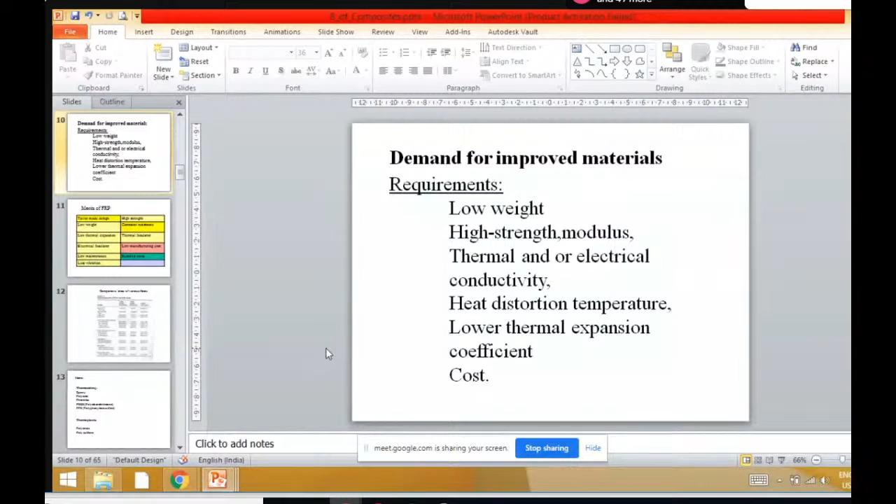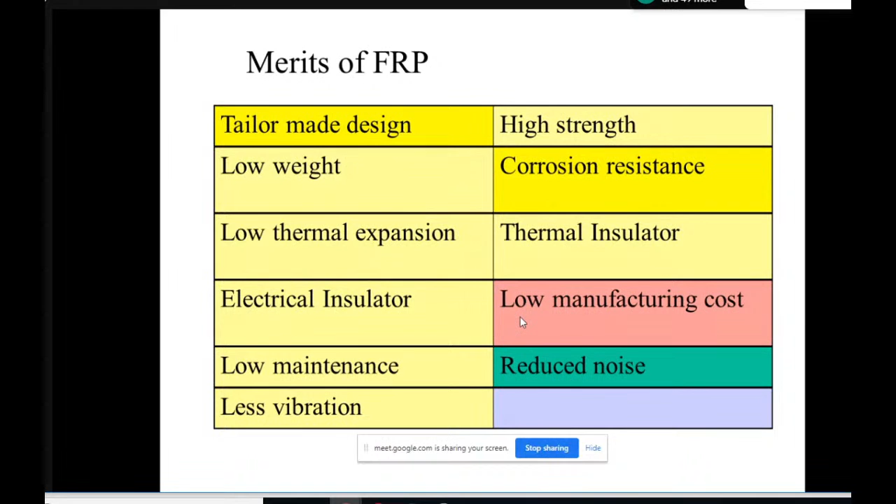So I was talking about this requirement for the improvement in the material. We wish for improvement in heat distortion temperature, lower thermal expansion coefficient, and the cost of the product. This is the main crux of FRP - what are its merits? It is a tailor-made design, so that you can derive whatever property you wish, and accordingly the proportion of the reinforcement and proportion of the matrix can be decided. Low weight, low thermal expansion - all these points I have already discussed. So the merits of FRP, the major one is tailor-made design - you can have your own desirable properties of the composite materials.

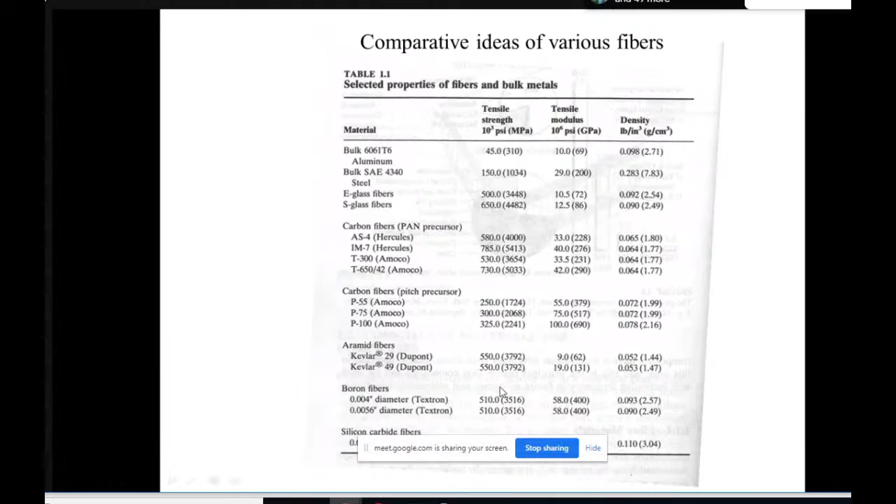Here I have just put a table for your comparative ideas. In the beginning it is not required, but various materials and various combinations can give you properties, say tensile strength from 45 to 510. So this is how properties can be changed or designed for a material.

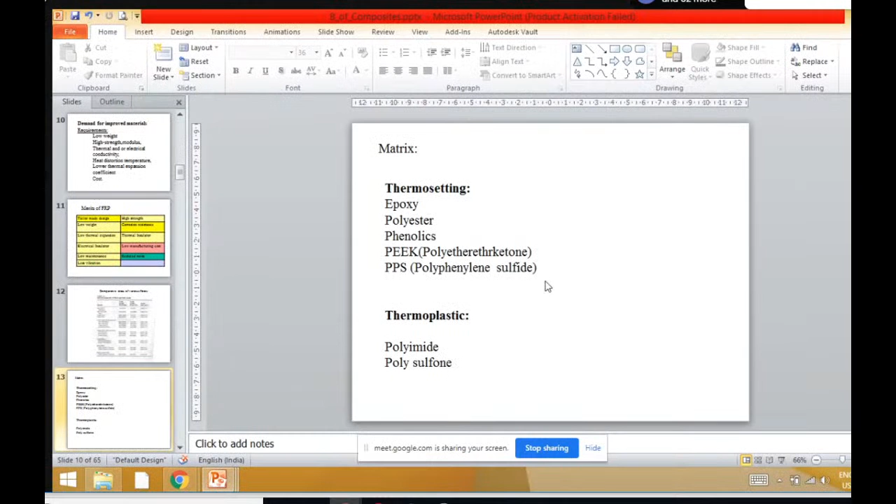Now, what are the different thermosets mainly used for composite materials? They are epoxy... Are you able to see the screen now? Yes sir, yes sir, yes sir. Okay.

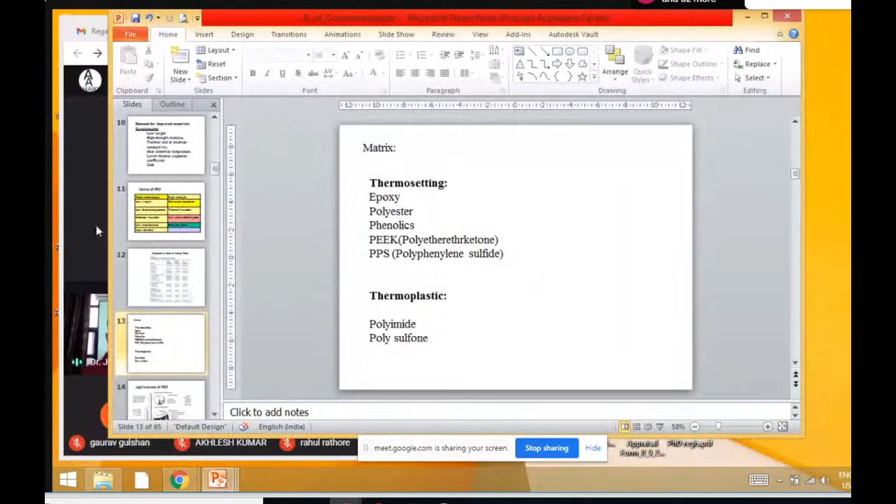Or I may have a slide like this. Yes sir, visible. So I think that the full screen option is better than this. Okay.

So thermosetting matrix materials mainly used for composites are epoxy, polyester, phenolics, PEEK, PPS, and similarly for thermoplastic, polyimide, polysulfone - these kinds of materials. Even nylons, acrylics are also gets extruded.

The application of FRP in various sectors - you can see from here that industry, aerospace, and sports are the major areas where composite materials are well known. After 1960, because of major aerospace projects where the cost of placing an object into space was very costly, the invention of this composite material was made, and it was fruitful for aerospace application. Even now, all consumer products are also available with FRP materials.

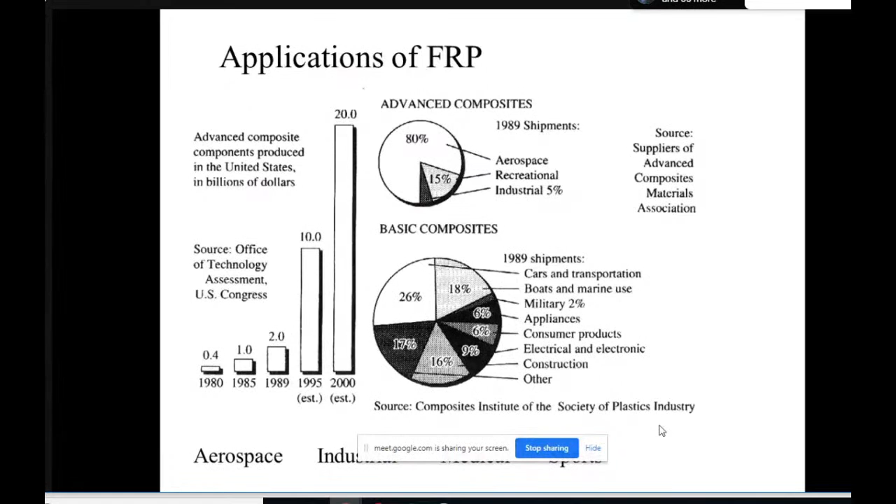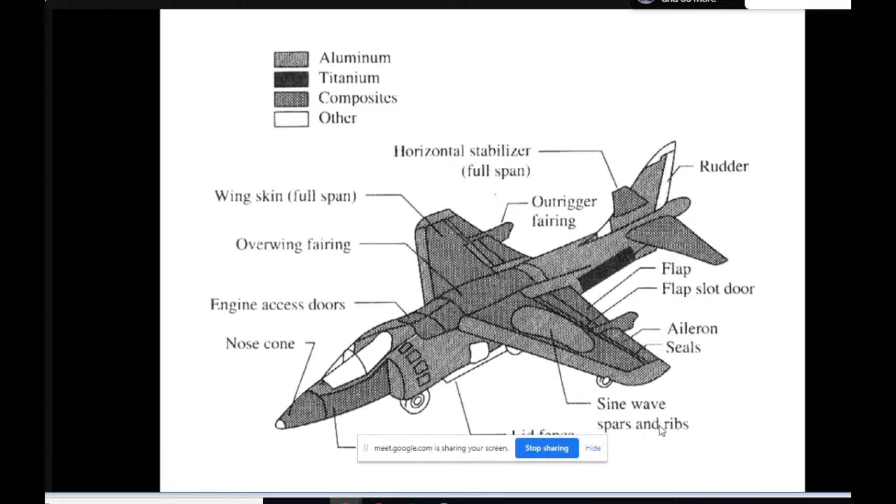This screen will be able to give you just a judgment that in aircrafts, the use of aluminium, titanium, and composite - these are the major materials which occupy the area for material utilization. So these two slides basically give you the idea.

In composite, people use the reinforcement graphite and Kevlar majorly rather than glass. Glass is normally used for consumer products for general purpose. But carbon, graphite, Kevlar - these kinds of high strength fibers - are mainly used in the aircraft industry because of their high strength property and low weight.

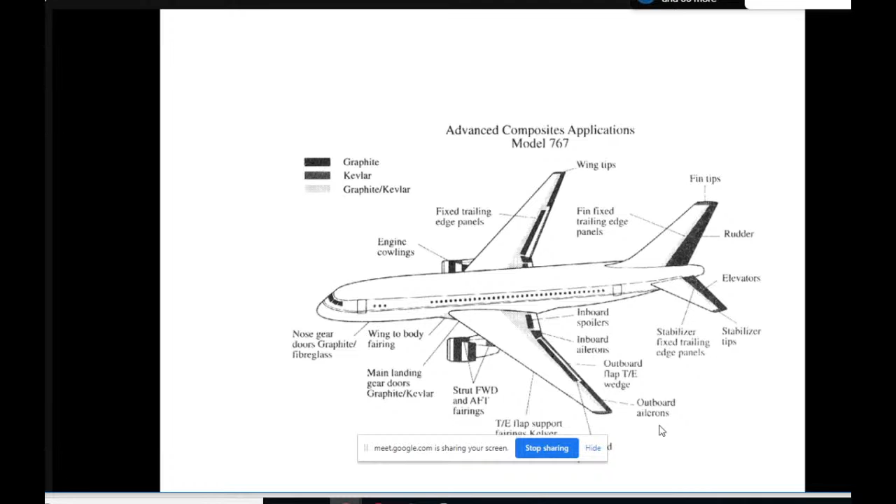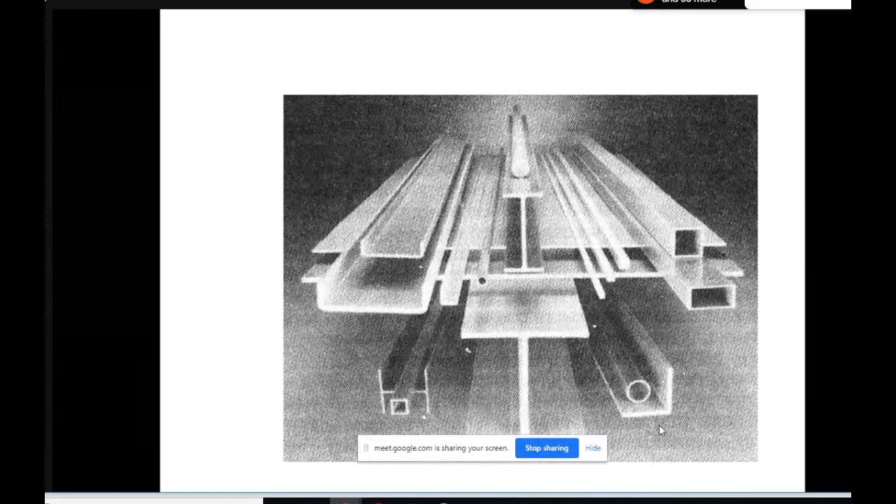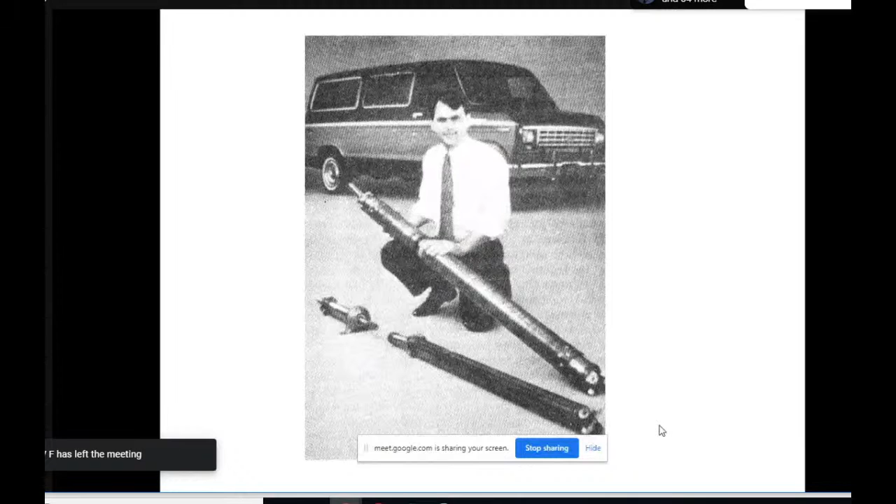Similarly, these FRPs are also extruded to various sections. Just like PVC pipe and other plastic material, the reinforcement materials are also available as FRP sections like pipe, round, circular pipe, square pipe, plates, and so on. Even shafts are being winded. Filament winding process is one of the good processes for circular objects to reinforce, or at times pipelines which we put below ground level where you don't want corrosion. Under that circumstance, filament winded products either from external surface or internal surface are prepared.

The demerit of FRP is welding. Repairing is a very big issue in FRP. If your aircraft is having a bird hit, under the circumstances some crack is formed. Now that component will not perform as it was performing earlier because of the formation of crack. It is not the case like metal that you can do the welding - it always gives you a long-term damage. So joining of FRP, welding and repairing, is a big issue in case of FRP.

However, there are solutions available. People used to put a patch on it. A composite patch is applied onto the damaged surfaces to restrict the growth of the crack.

Of course, the environmental condition also makes a difference - the resin surface gets deteriorated, and if the atmosphere produces moisture, that moisture will be absorbed by the fiber and they swell, and the interface gets affected by these kinds of things.

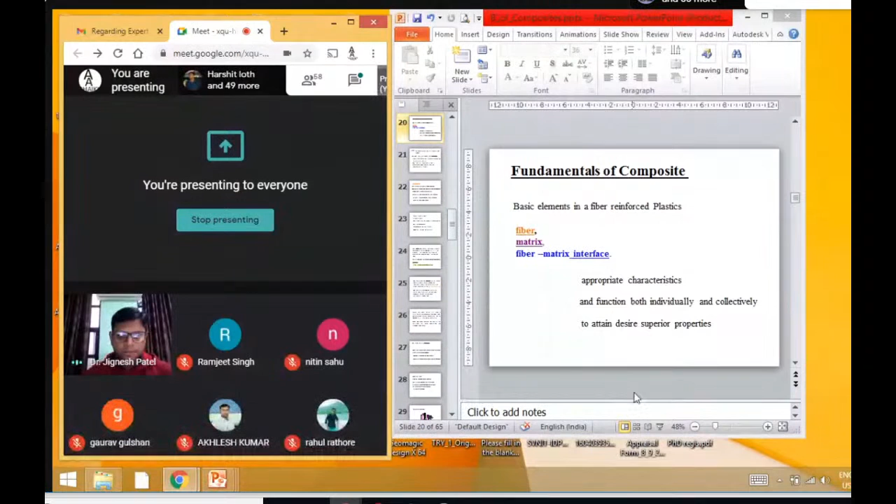The basic elements in FRP are fiber, which we say is the reinforcing element, matrix element, which basically holds all the fiber in appropriate position, and the third important point is the fiber matrix interface. Wherever the joining takes place at the surface of fiber, we say fiber matrix interface. There is one more term which defines this interface as 2D, or interphase as 3D.

So the bonding, if it is of zero thickness, we say interface, where they just begin to contact, and when there is interaction taking place between both surfaces and they form a 3D zone, we say interphase. Later on we'll see some slides on how to check this interface, whether it's sound or not. So appropriate characteristics at the interface and their function, both individually and collectively, are required for attaining the best properties of the composite. If there is no proper bonding, then the composite strength will be weak - there may be a failure at the interface.

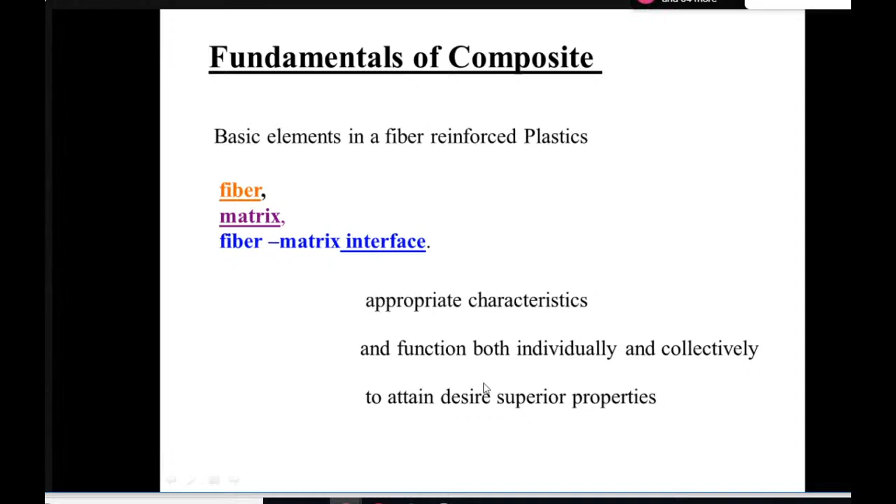Fibers have extremely high tensile strength and moduli, and they are defined as a fiber if they are longer than 100 micrometers and the length to diameter ratio is greater than 10. The tensile strength of the fiber is many magnitudes greater than the same material in bulk. The meaning is, if I take aluminium as bulk, and if I derive the wire from aluminium, then it is aluminium fiber - the properties of the fiber will be high as compared to the bulk material, because the thinner the material, the flaw will be less.

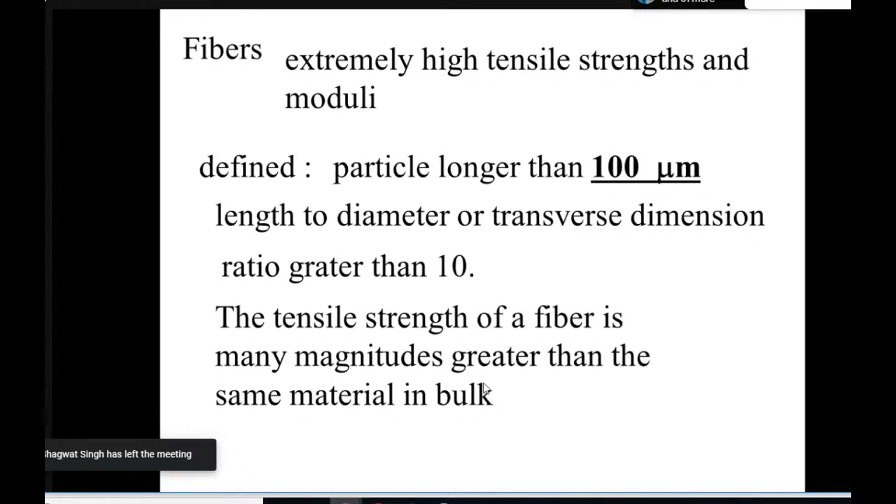That is Griffith's law. The thinner the material, it will exhibit good property because you are removing the flaws from the material. Bulk graphite, a brittle material, has a strength of 10,000 pounds per square inch. The commercial graphite fibers have, you can see, 800,000. So you can see the improvement in the particular property as a bulk material versus a fiber material. So basically this slide gives you an idea that when the material is available as a bulk material, it has certain property.

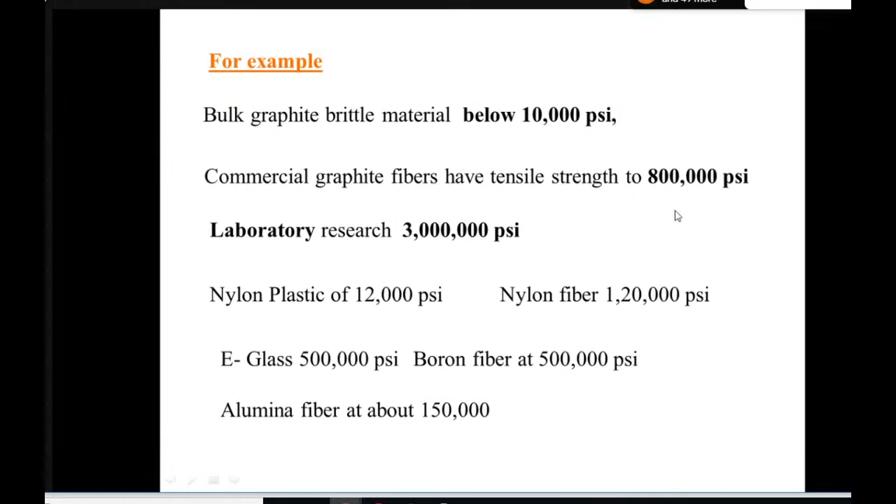But the same material, if it is converted to fiber, the properties will be improved tremendously. The Griffith law repeats that the thinner the material, the higher the strength. So fibers normally have high strength. They are the best reinforcement. They improve the strength, and at the same time they lower the cost of the material, not in every case, but whenever the cost of reinforcement is cheaper than the cost of the matrix material, under those circumstances you will get that benefit.

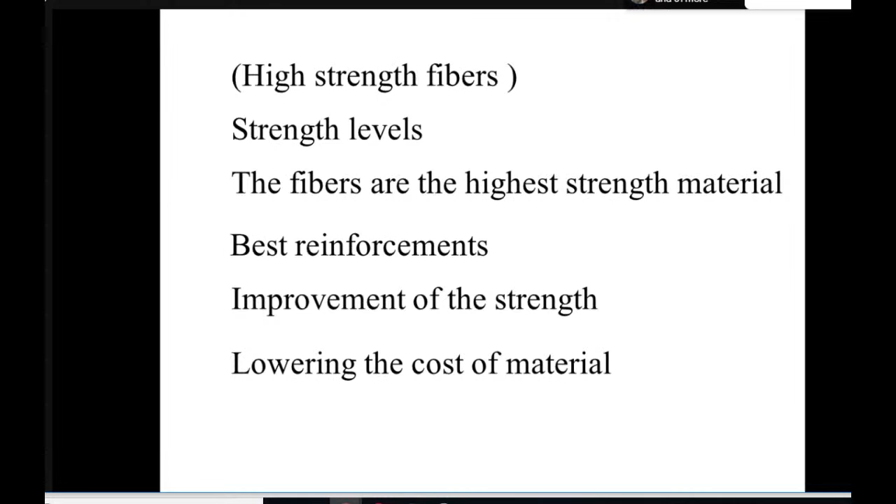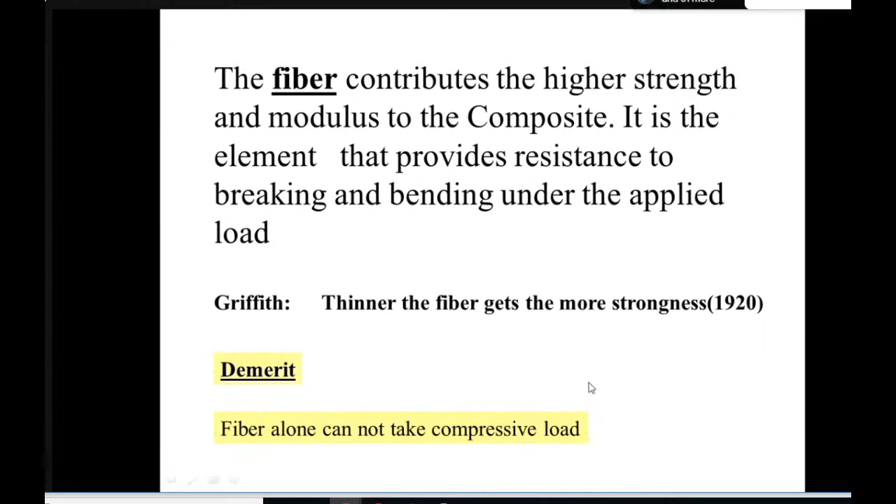The fiber contributes higher strength and modulus to the composite. This I have just discussed with you. The thinner the fiber gets, the more strength it has. The demerit of the fiber is that alone it cannot take compressive load. It will buckle. So you need a matrix. Without matrix, the fiber will not contribute anything.

So the main role of matrix is to transmit and distribute the stresses among the individual fibers and to maintain the fibers in the desired orientation. The orientation may be unidirectional, all fibers available in the 0 direction, or all fibers may be available at 45 degrees, or 90 degrees to the testing axis. In a sample, all fibers should be straight, all fibers should be inclined, or all fibers should be at transverse 90 degrees available. That is the desired orientation.

The matrix also provides protection to the fibers from abrasion and from the moisture available in the environment. So without matrix, the fiber alone has no meaning because it doesn't take any compressive load. And if you want to protect them from the environment, if you want to keep them in a specific condition, you need a matrix. Now when you have a matrix, you create a boundary at which both materials get bonded. The matrix provides protection against fiber abrasion and against environmental conditions. It also causes the fibers to act as a team because all the fibers are kept in intact position. The maximum service temperature of the composite is limited by the matrix.

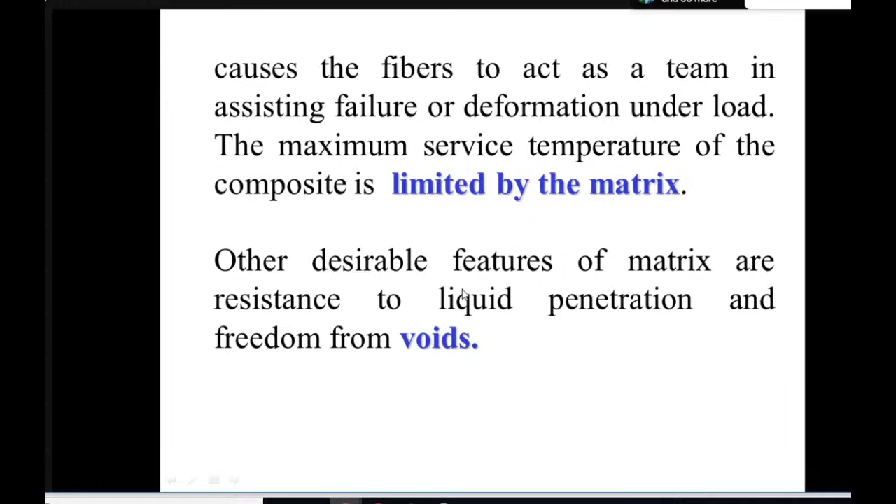So whatever is the limitation of the matrix, that will be applied to the composite material. The fiber may have any property, but the moment the weakest component gets damaged, the entire composite gets damaged. The other desirable features of matrix are resistance to liquid penetration and freedom from void. Void is, say, bubbles of air which may form during the process, created during the stirring of resin material.

Now when you apply them, the boundary which we already discussed is the interface. Localized stresses are usually highest at or near the interface. Whenever we design a metal component, we check that if welding is applied, if it is not failing from the welding joint, the component is safe. Exactly the same way, whenever there is an interface, you need to check the interface. Is there a perfect bonding between the surfaces of fiber and matrix? If it is there, then your composite is safe. And if it is not there, then interfacial debonding will be the major cause of failure of the composite material. Now, if there are issues at the interface, premature failure of the composite is also possible.

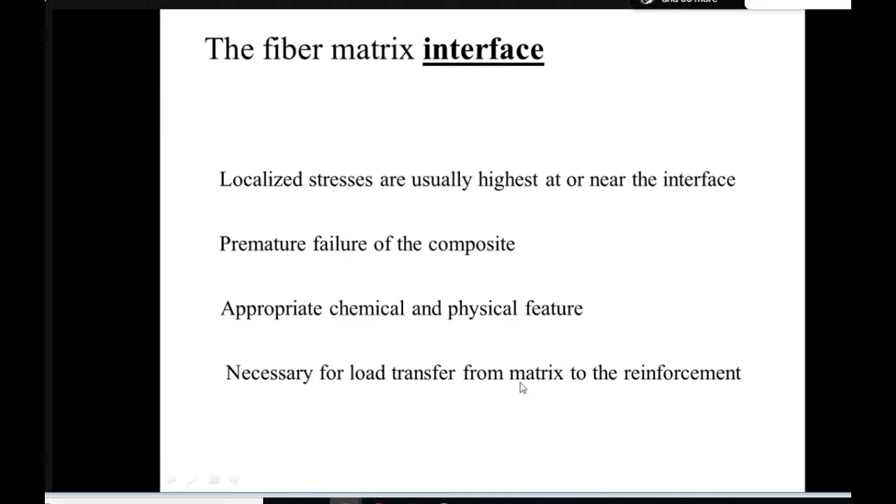But appropriate chemical and physical features are also necessary in both materials for a good interface. This interface is necessary for load transfer from matrix to reinforcement. This is a very important statement, because whenever we design, we should take this concept that basically load transfer is not from fiber to matrix, but it is from matrix to fiber. Now, this interface can be improved by using an appropriate coupling agent.

The interfacial bond must resist stresses due to differential thermal expansion of fiber and matrix, shrinkage of the resin during curing, and must protect the fibers. Even in a bridge, after a certain span, there is a gap of say 1 or 1.5 inches to account for environmental conditions, since material shrinks in winter and expands in heat. If it were one piece, cracks may form. Similarly, terrace tiles get debonded in hot conditions because of thermal expansion. So you can apply an appropriate coupling agent to improve the interfacial condition.

This bonding is very important. Failure at the interface should always be avoided.

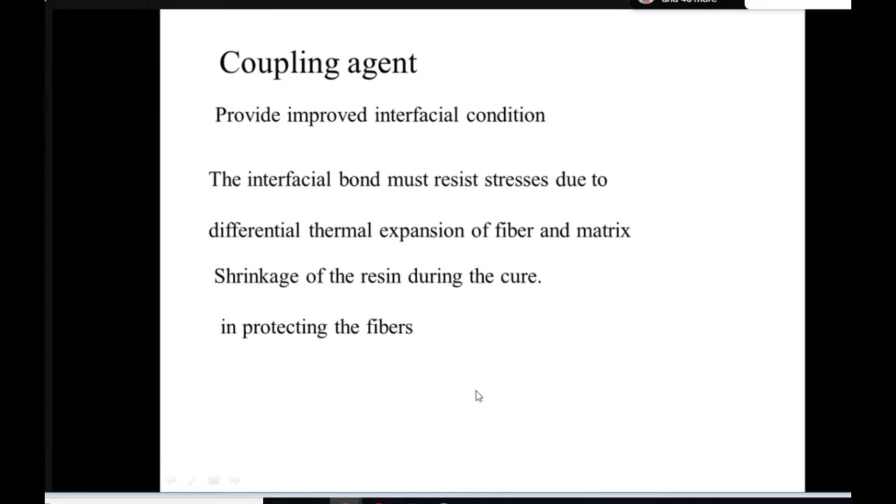Before I go to the manufacturing processes, I'll give you one more slide.

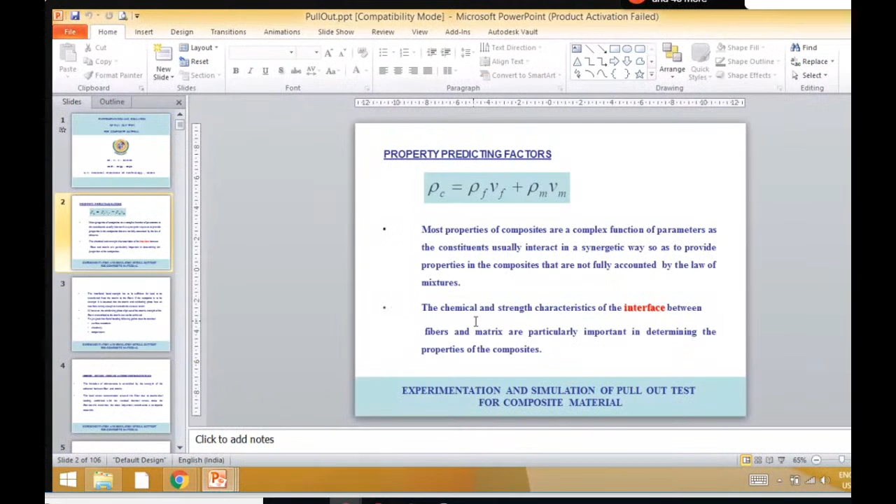Interface and interphase: the interface is defined as a two-dimensional border between fiber and matrix, in cases where no interphase is considered to be present. Interphase means a three-dimensional region. If it is not formed between fiber and matrix, there will be direct contact between fiber and matrix, and we call that boundary an interface. But the interphase is defined as a three-dimensional region between fiber and bulk matrix with a different morphology, chemical composition, and mechanical properties compared to both fiber and matrix.

In the case of metals, we call this alloying. When we mix two different materials, for example adding chromium to aluminium, alloying takes place, and that alloy has some different property that doesn't match either part A or part B. In exactly the same manner, the three-dimensional region formed between fiber and matrix is the interphase, a 3D region between fiber and bulk matrix with different morphology, chemical composition, and mechanical properties compared to both fiber and matrix.

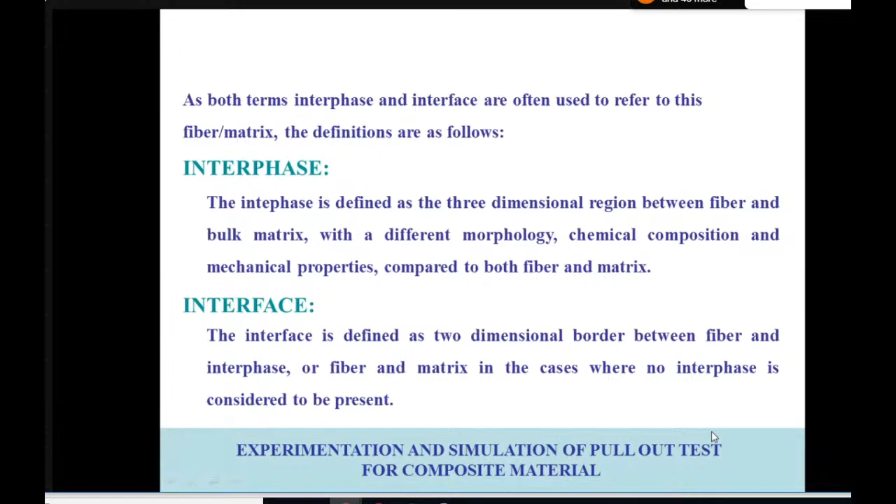So here, to measure this bond strength and check whether a perfect bonding between fiber and matrix has been generated, this can be taken care of using the pull-out test. For beginners, understanding this property, the bonding between fiber and matrix, is very important.

For that, people go for a pull-out test. Normally we go for a tensile test, compression test, or shear test, but whenever we talk about composite materials, we should always first consider the bonding between fiber and matrix at the interface.

In live classes, I often give the example of bond materials like Quick Fix, Quick Bond, Fevi Bond. When you want to join anything to anything, you just put a drop and stick them together. On the box it's written that you can join anything to anything, except a broken heart. People usually laugh when I say this in class. Now let me explain what this broken heart means.

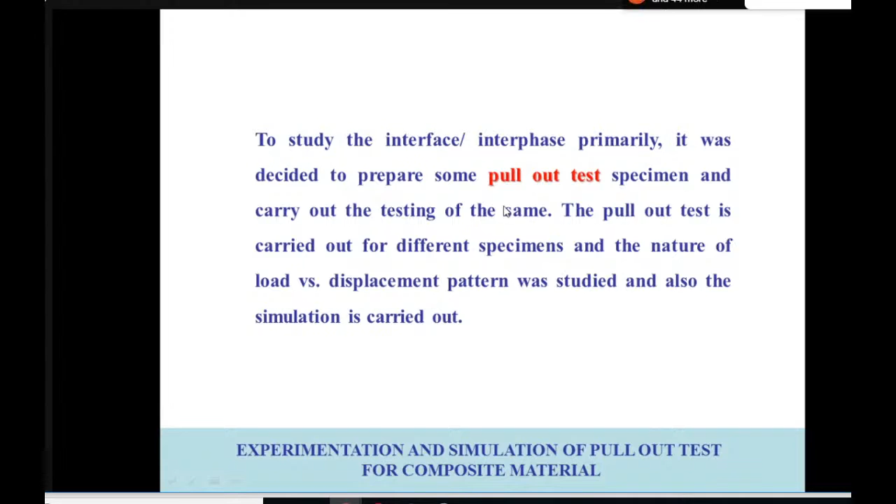Compatibility of the material is very important. Compatibility between the materials is very important. I think there are some properties here, let me show you this one: wettability.

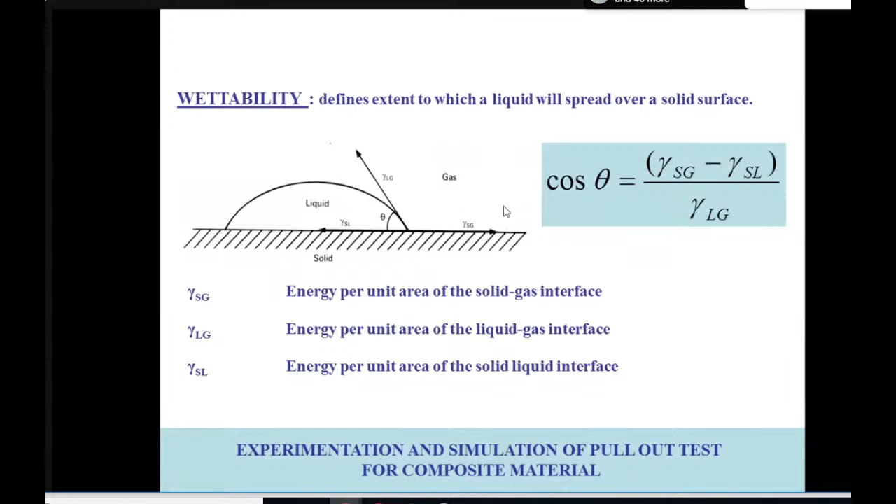This purely depends on the material itself, material A and material B. If you apply a resin to any fiber, maybe carbon, boron, or graphite, and that resin is not able to wet it properly, you will get a dry region in the composite material when you cut it. Wherever there is a dry region, you cannot design a proper composite; it's a very big demerit for the composite material, and the interface surface will not be appropriate. So interfacial bonding means once the matrix has wet the reinforcement and is therefore in intimate contact with it, bonding will occur.

So this is very important, you need to read this initial line. Once the matrix has wet the reinforcement and is therefore in intimate contact with the reinforcement, bonding will occur. In design of composite material, there is a first assumption that there is a perfect bonding between fiber and matrix, then only the rule of mixture will be applied. We'll see later on what is the rule of mixture.

So here I'm narrating the same thing with different definitions, that it is an interfacial bonding. The matrix should be able to wet the fiber. If it is perfectly wetting the fiber, then there is an intimate contact, perfect bonding, and then the material is perfectly designed. Now a number of different types of bonds may be formed when you apply this condition.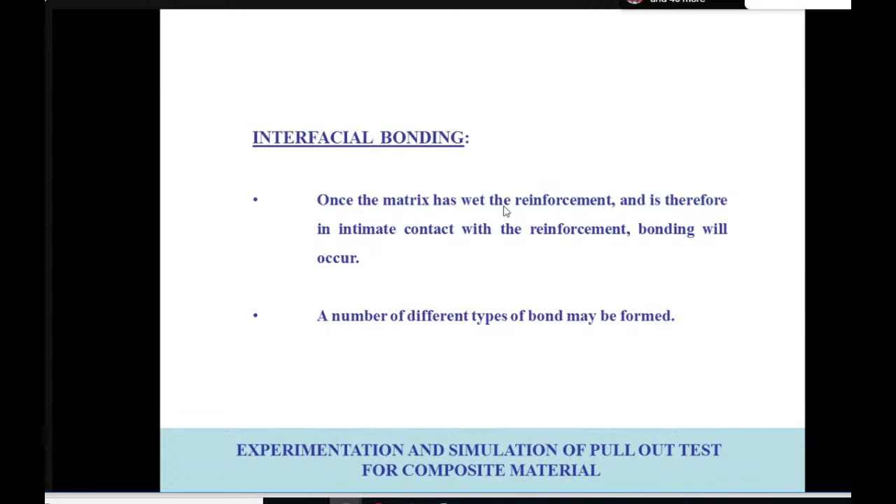So we say interfacial bonding, say mechanical bonding. You know that on a bike accelerator there is a serration, mechanical serration. Why is there a mechanical serration? So that our hand can properly grip it. If our hand is not able to properly grip that accelerator, there may be slippage. Now, in order to avoid that kind of slippage, the surface should be rough. It should not be smooth, it should not be a finished one. It should have irregularity so that mechanical anchorage takes place. This is mechanical anchoring at the two surfaces.

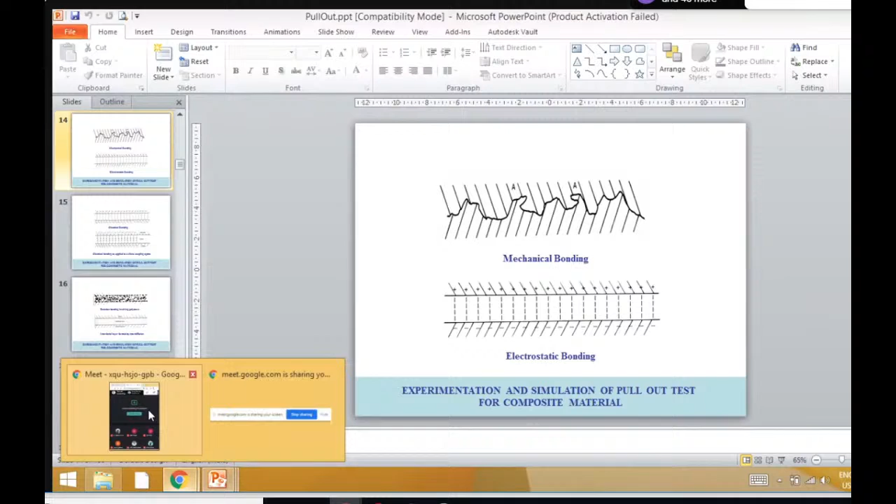Hello, any issue? Are you able to listen to me? Yes sir, am I audible? Yes sir, yes sir, yes sir.

So mechanical bonding is the best thing, and therefore a lot of research papers you will find on surface treatment for getting better properties of composite material. It is nothing but on the surface of fiber, we are basically removing the finishing and we are creating an etching surface so that this mechanical anchoring can be generated between the resin and the fiber material.

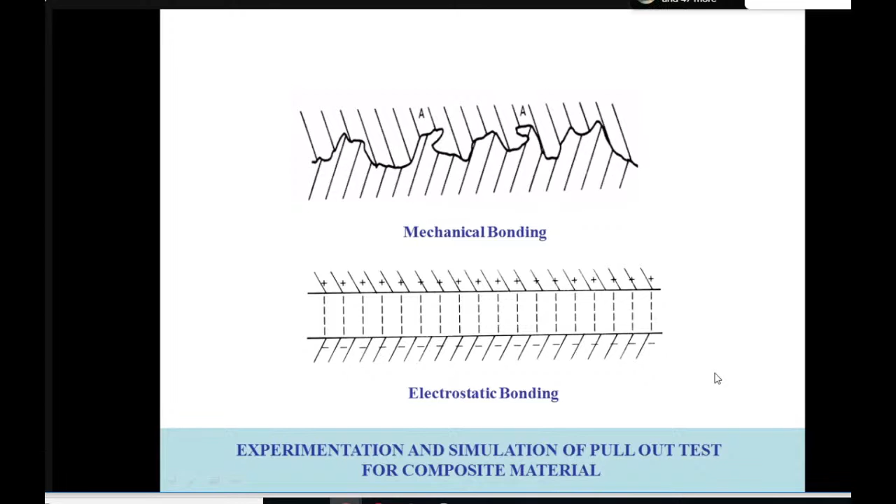Similarly, you can have electrostatic bonding, you can have chemical bonding. So all these kinds of bondings are possible, including reaction bonding.

So a better understanding of the interrelationship between fiber, interface and matrix will lead to the concept of interphase, that is a three-dimensional region between fiber and matrix with different mechanical properties. And if you see many research papers, people working on the interface believe that whenever you bond material A with material B, if there is good compatibility between them, then this three dimensional interphase region will be generated and it will be responsible for the good design, that it will give proper bonding. And the assumption that normally people take in the case of rule of mixture is that a perfect bonding between fiber and matrix can be attained.

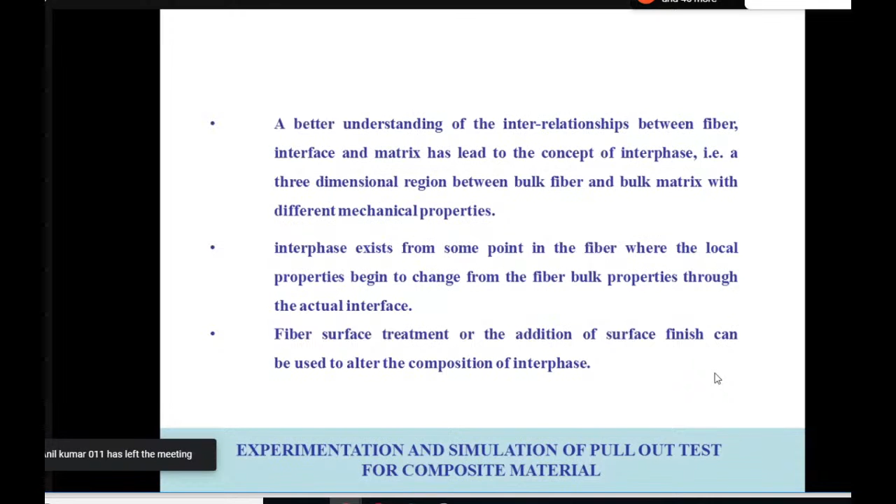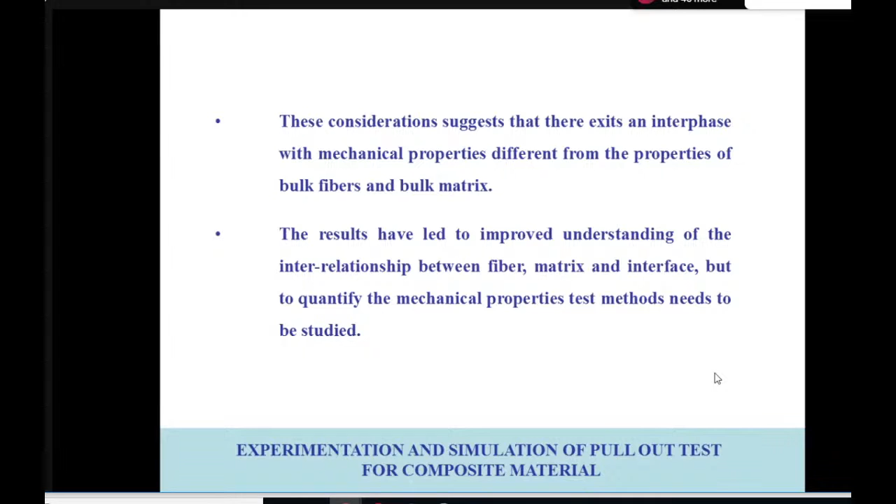Now this term also we have seen, coupling agents. There are certain elements which try to become mediators and they try to improve the bonding by using coupling agents. So this is one of the examples, that coupling agents can be applied onto the fiber surface, or there may be a treatment to the surface so that it becomes a rough surface and it becomes readily available to be wetted by the resin materials.

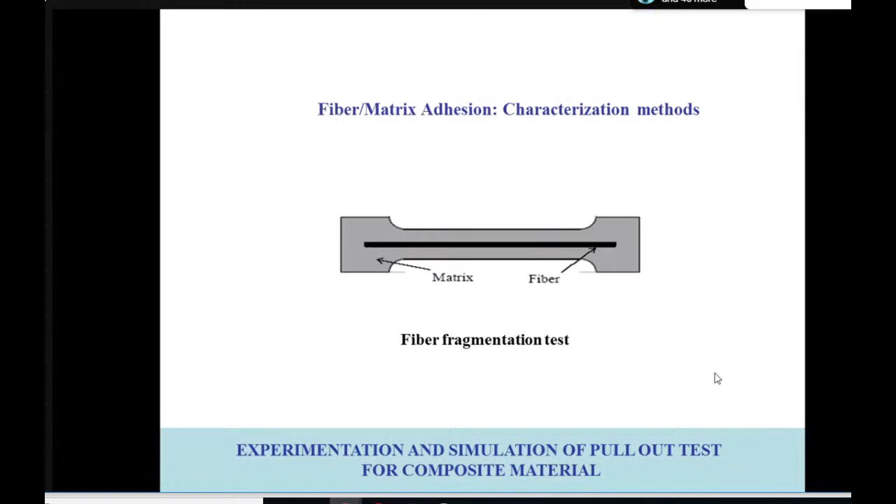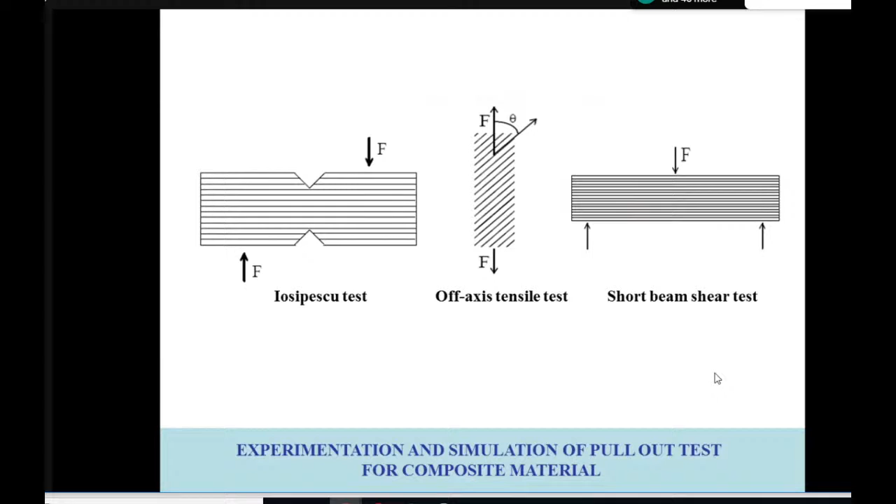Now the fiber matrix adhesion can be tested under this pull out fiber fragmentation test. You can have one test like this. In a matrix, you will have a single fiber, and you should try to test it for unidirectional tensile strength. You can also go for short beam shear, off axis, or this Iosipescu kind of test. So all these tests are possible.

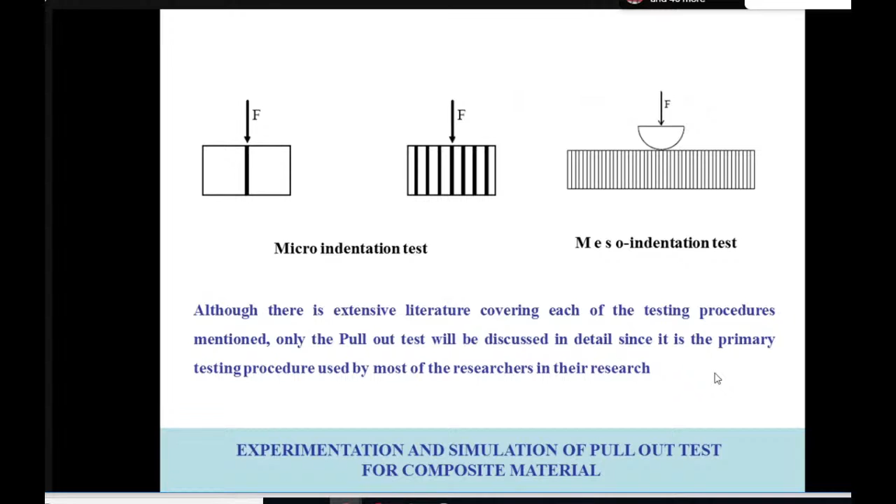Then for a pull out test, you have an option like micro indentation test or meso indentation test. You can see here the arrow which has been shown, which is trying to push the fiber out from the matrix. So these kinds of tests will give you the property of what is happening at the interface. Similarly, you can see here a cylindrical matrix is assumed, and in the center the fiber is being placed as a black colored one. Now if you try to pull this, then this particular surface will give resistance, and this resistance is mainly due to interfacial property between fiber and matrix.

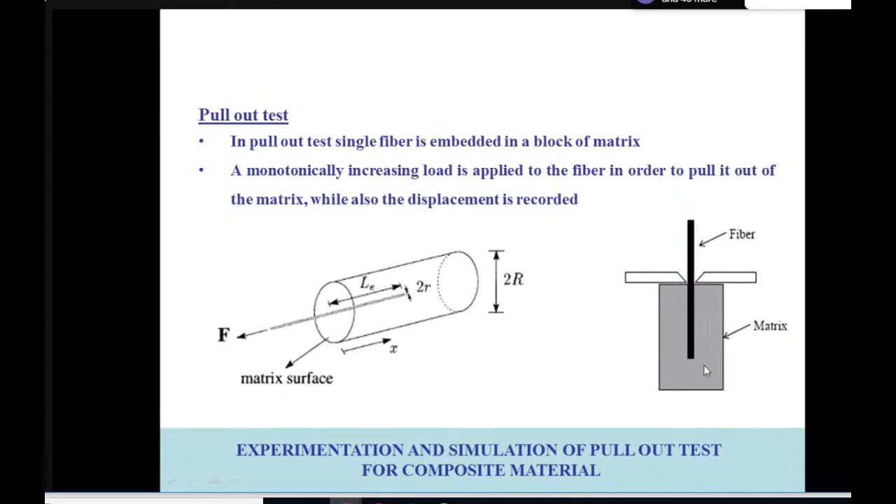So if you are able to remove the fiber easily, then the design of composite is not proper. But if it gives a lot of resistance and then after a certain value of load it comes out, you can say that yes, the interface exists and it will give a good strength to the composite material.

There are various formulas available whereby you will be able to evaluate the interfacial shear stress and many more properties. Here I'll just show you one example with our own experimental work, where you may have a case like this. For case A.

Initially, the bonding will try to keep the internal fiber up to some extent, and then suddenly it will fail, giving a failure like this. The second case, gradually it will give bonding up to a certain limit, then try to give resistance, and then slowly fail. So basically the interface is giving resistance in failure.

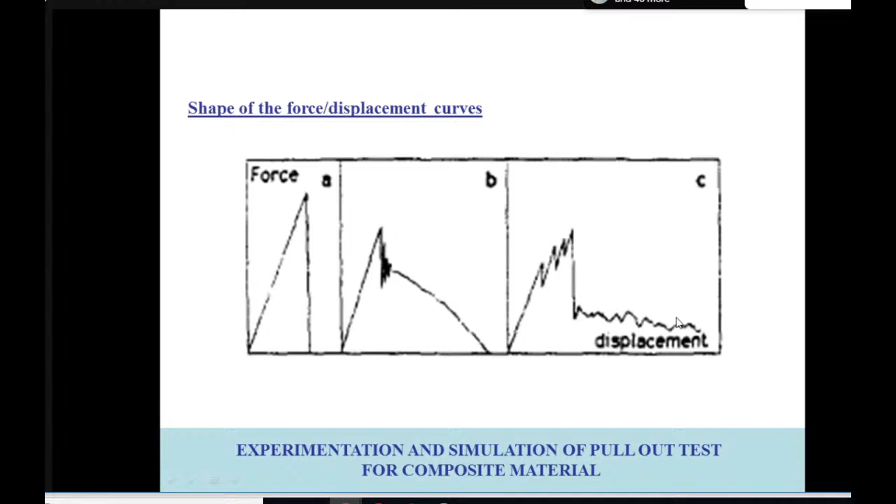The third case, C, is the best case: if you have prepared a staircase kind of structure onto the surface of the fiber, then at every instant it will give bonding and then resistance by mechanical anchoring. That is why we prepare the surfaces of the fiber, and by using a rough surface you can increase the interfacial strength tremendously, maybe from basic bonding to 3, 4, or 5 times, depending upon the kind of mechanical engagement you have been able to generate.

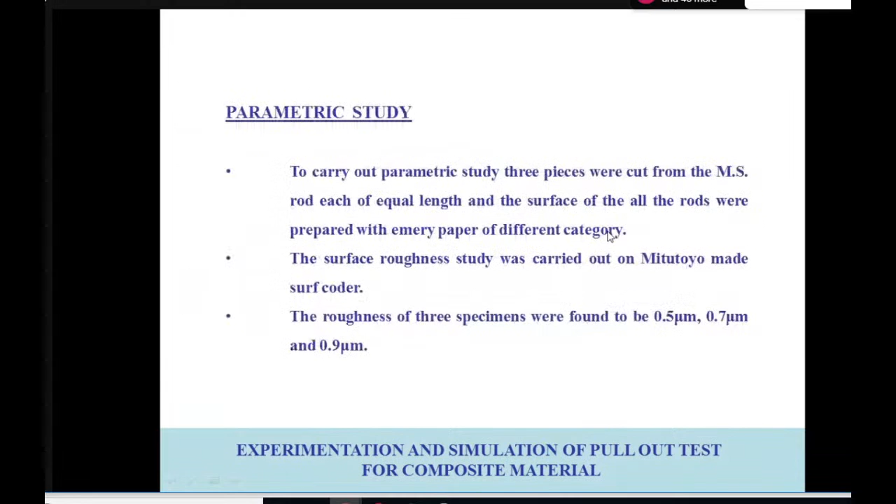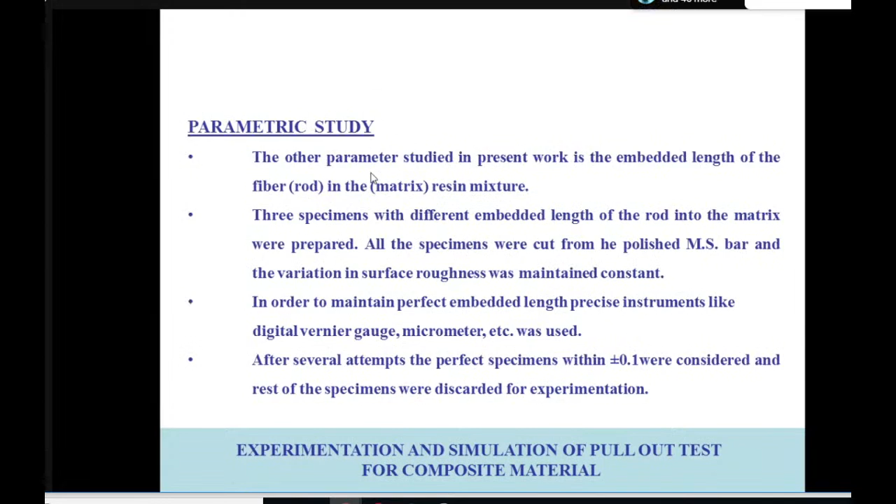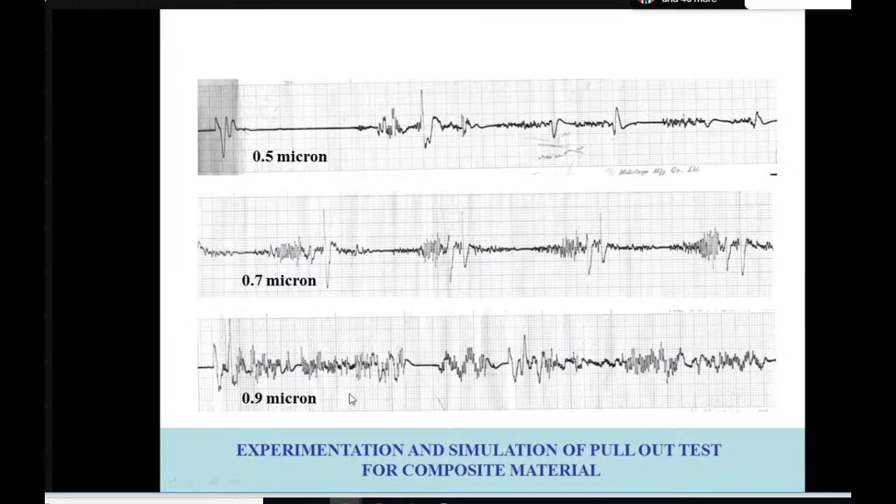This is a polymer, and a rod is inserted into it. Now I take up this case as a single fiber embedded into the matrix material, with the surface of this reinforcement having various roughnesses. For that we took these cases: 0.5 micron, 0.7 micron, 0.9 micron. This rod is initially rubbed with emery paper of different roughness, and depending on that we could measure 0.5, 0.7, 0.9 micron. So various roughnesses were created manually, and specimens were prepared accordingly.

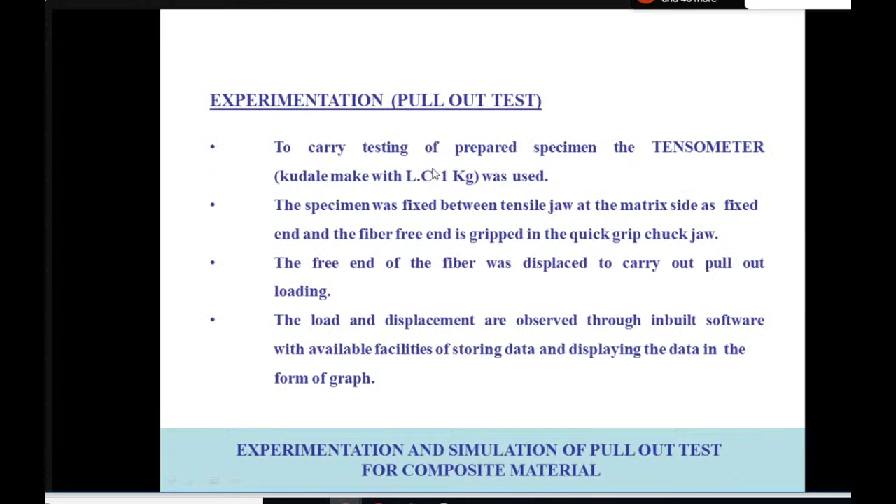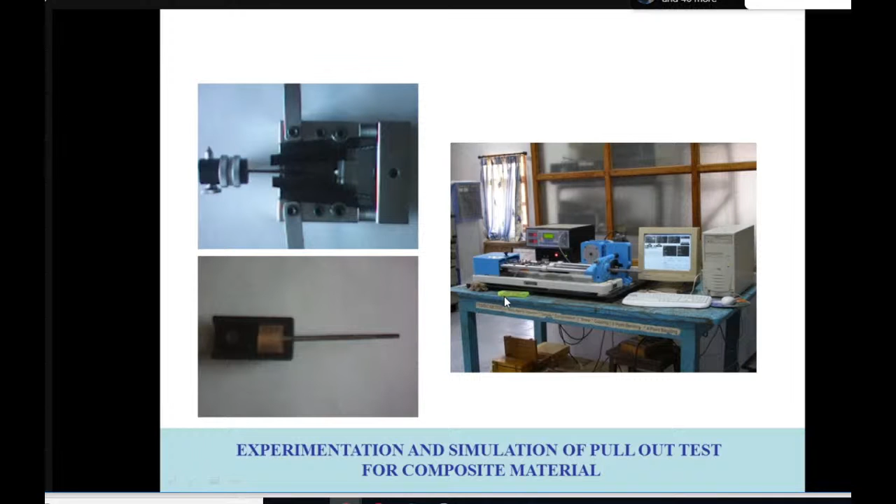Once these specimens are prepared, they are taken to the tensometer. One jaw is used to hold the polymeric portion, and the rod is taken to the other jaw of the machine so it can apply the pull. This tensometer used in our laboratory has a capacity of 2 ton loading during tensile testing, and it has been applied to pull this out completely.

This pull out test gives you the idea of what the strength is at the interface, the bonding between fiber and matrix. We presume there is perfect bonding between fiber and matrix, meaning theoretically there will be no failure at the surface - either the matrix will fail or the fiber will fail - but in real life it may not happen that way.

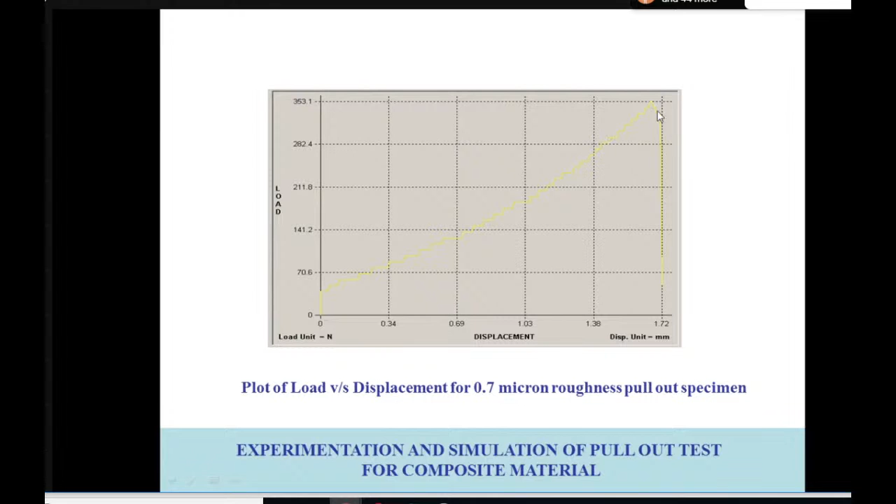This zigzag means that whatever emery paper you applied onto the rod, at every instance you will feel there is a resistance - that is why this peak and valley has happened. Then after a certain period, it falls down. Similarly here for 0.7, it moves up to here and then sudden failure. So this is how you will be able to see these failure results.

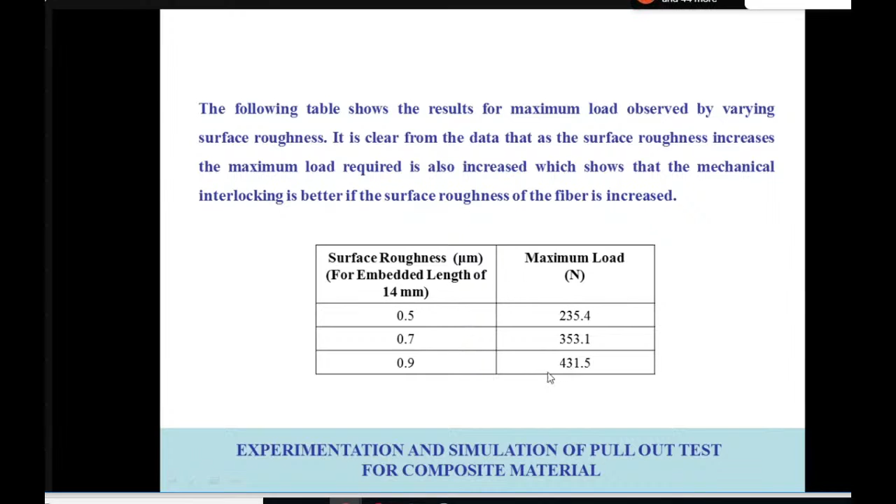I'll just show the table now. See, when there was 0.5 micron applied, compared to when you go for a bigger size of emery paper with more roughness, you get this reading. So for 0.5, 0.7, 0.9, the load required to pull the rod from the polymeric ring keeps increasing.

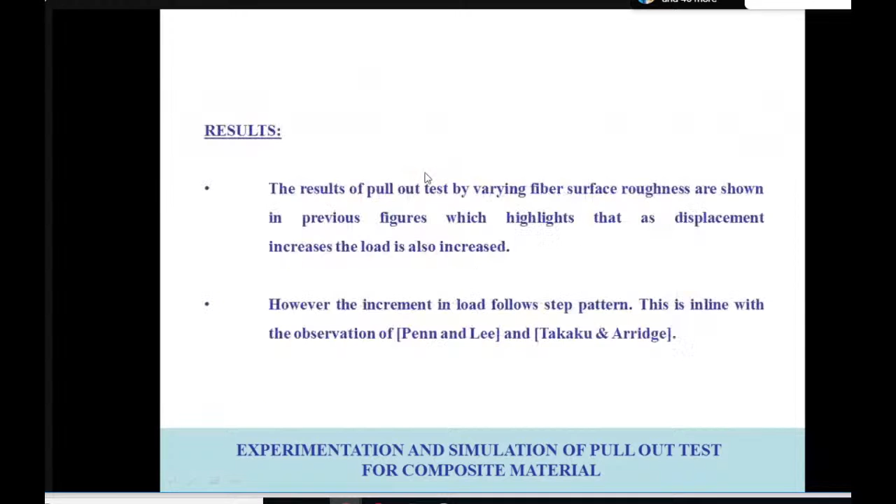The second criteria was varying embedded length. Now if you see this sample, the particular rod which is inserted into it was having a varying length: 4 mm, 7 mm and 10 mm.

So into the cylindrical object of polymer, polyester, we inserted the rod for 4 millimeter depth, 7 millimeter depth, and 10 millimeter depth. By increasing this embedment length, we provide more area of contact between fiber and matrix.

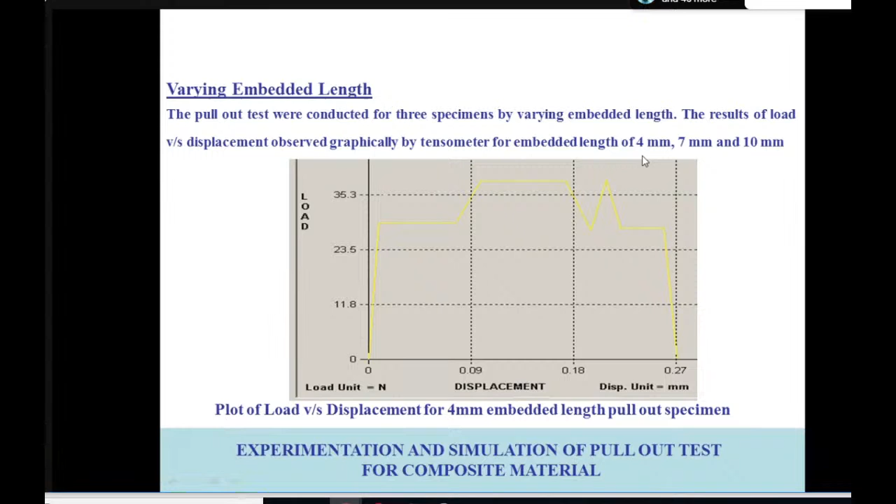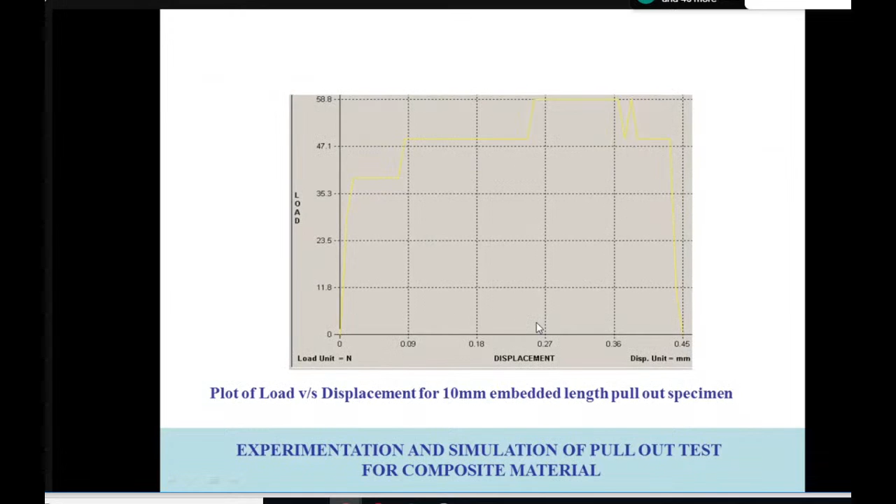So interface surfaces are being increased by this embedment length. Now, if you increase the interface length, what happens to 7 mm, 10 mm, and 4 mm? By results you may be able to see that for a 4 mm the load required is 39, for a 7 mm it's 49, for a 10 mm it's 58.8.

So basically this gives you an idea that if you take the fiber and matrix, what are the different parameters, what contact area you give between the fiber and matrix for bonding, accordingly the strength will be varied. So even if we consider the theoretical case by tackling it with the rule of mixture, we say VF, EF, VM, EM - volume fraction of fiber, volume fraction of matrix, and what is the property of fiber, what is the property of matrix.

But at that time, certain other parameters are also equally important for designing the material, that we have seen by this pull out test, that if the surface area is improved... and that is why now people are using carbon nanotube insertion into the matrix, because at the interface they give tremendous area. 1% of carbon nanotube can increase the percentage of interfacial area into a numerous value.

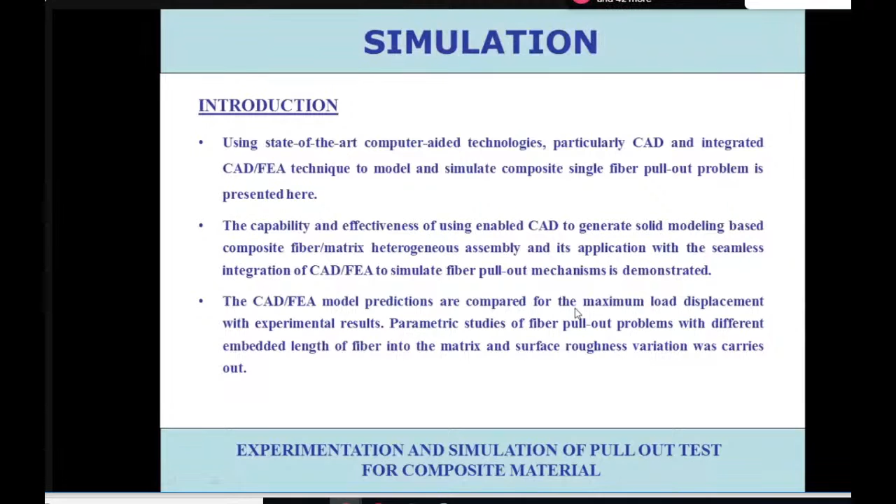So thereby the property can be improved by incorporating the carbon nanotube. Now, the same thing I am showing you here as an experimental case, I have simulated also by the FEM approach.

So we just make a quarter rod, 1/4 area of the rod, and here the cavity is being created for inserting the rod. Now you can see this - this is representing embedded length. This is representing, you can have 4 mm, 7 mm, 10 mm.

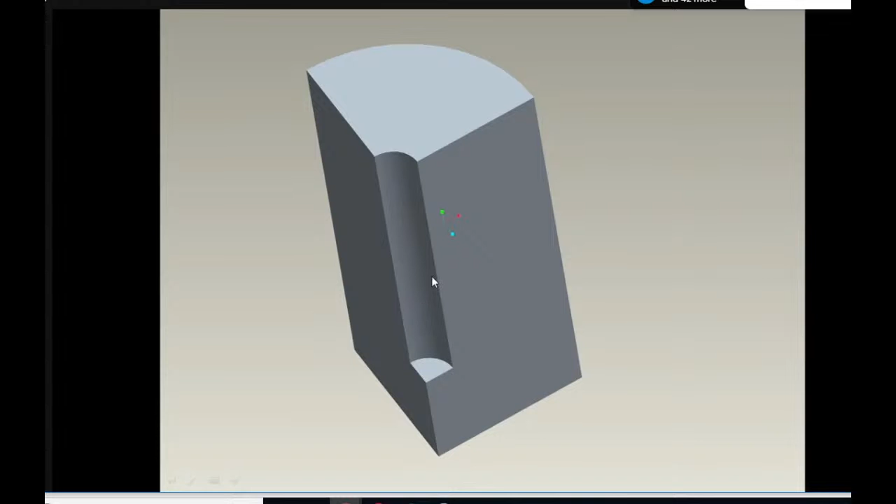And then on this surface, this is a smooth surface. There is no serration, it is purely finished. So it will not resist anything in a zigzag manner - purely bonding will be exhibited by this.

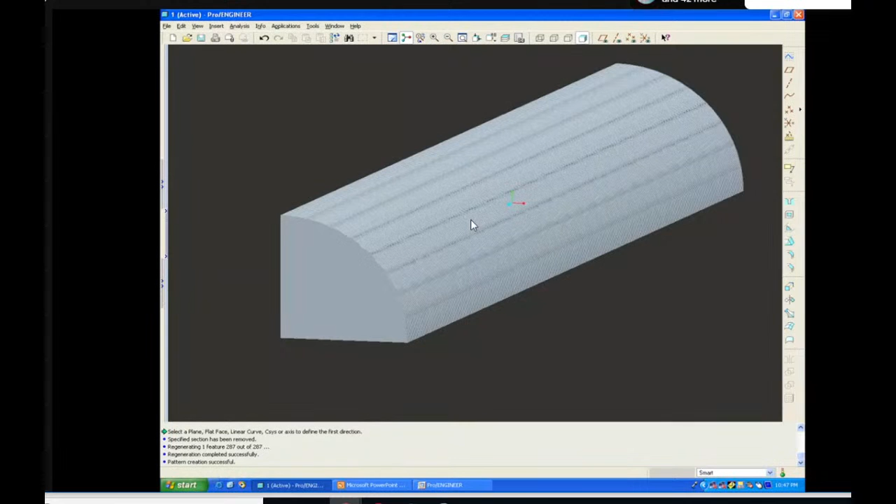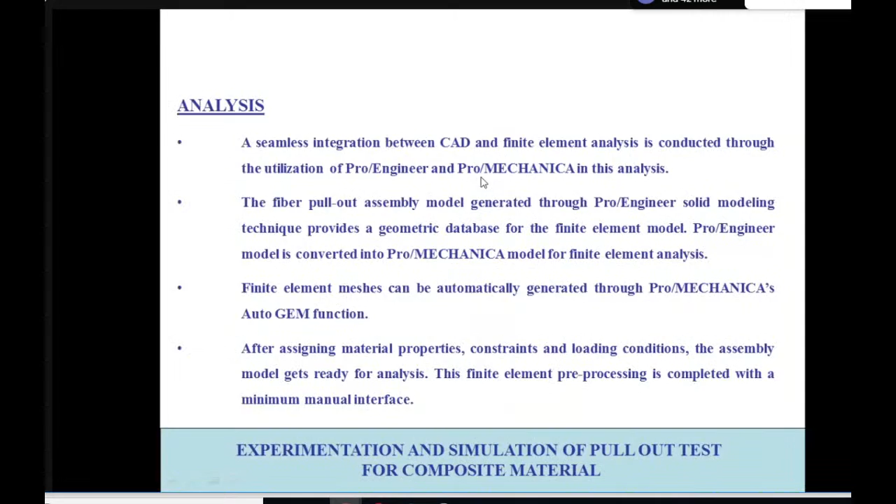Then we go for the analysis using Pro/E Mechanica. Of course, this is not a good software, not appropriate for the highly computational aspect, but for preliminary observation you can use this one. Otherwise, you can go for ANSYS, Abaqus, where you can consider more detail and more options for defining the composites.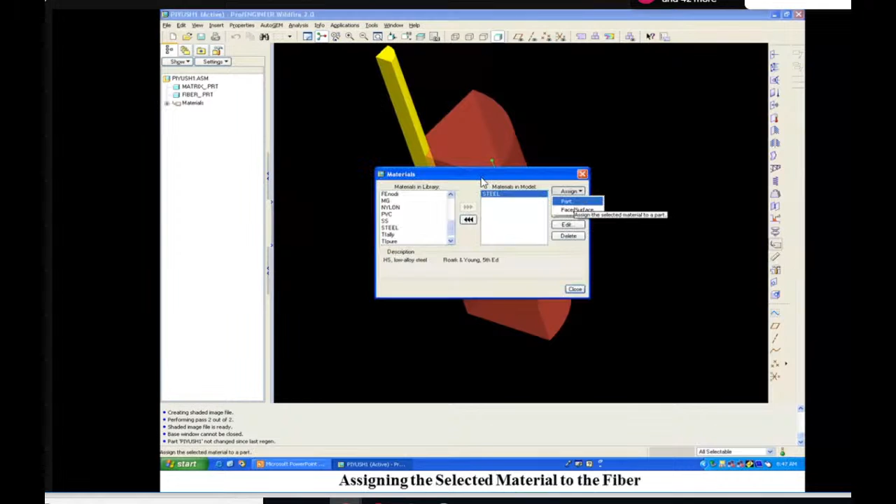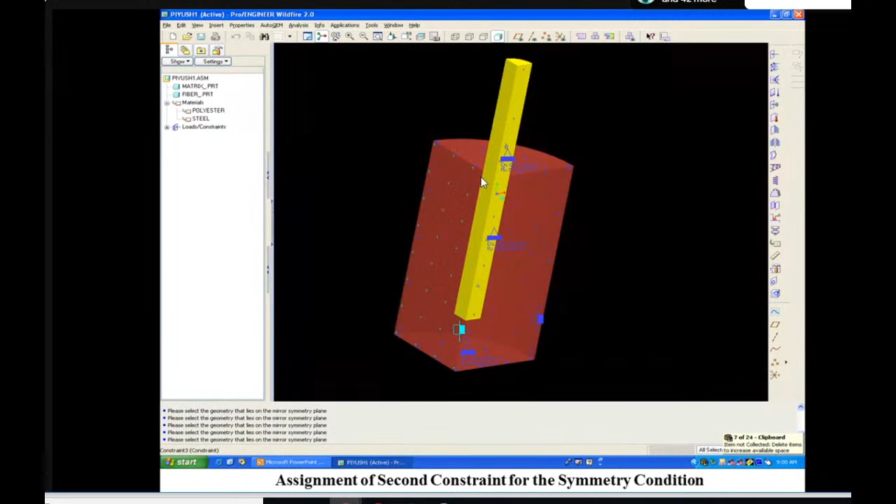So we go for varying this. We define the one material, we define the second material, we define the boundary condition, we define the loading condition, meshing - everything was defined. The faces were also defined for setting degree of freedom to be 0. That particular face is fixed. And then the load conditions are also given to pull the rod.

And what we have seen in the tensometer case, the same simulated results are being applied over here. And in the post-processing result, we can see some displacement, some stresses. So all these results we will be able to note down from here. You can see that this is a pull in this direction, and this is the amount of stresses generated into the fiber body and into the matrix body. So here this is the displacement result.

So we compare the surface roughness variation by 0.5 micrometer, 0.7 - this we measured by Mitutoyo surface roughness measurement on the rod. Then we see what is the maximum load, what is the displacement, we see the same thing in the simulation also, and what is the percentage deviation we find in the result between the simulated result and the actual measurement result.

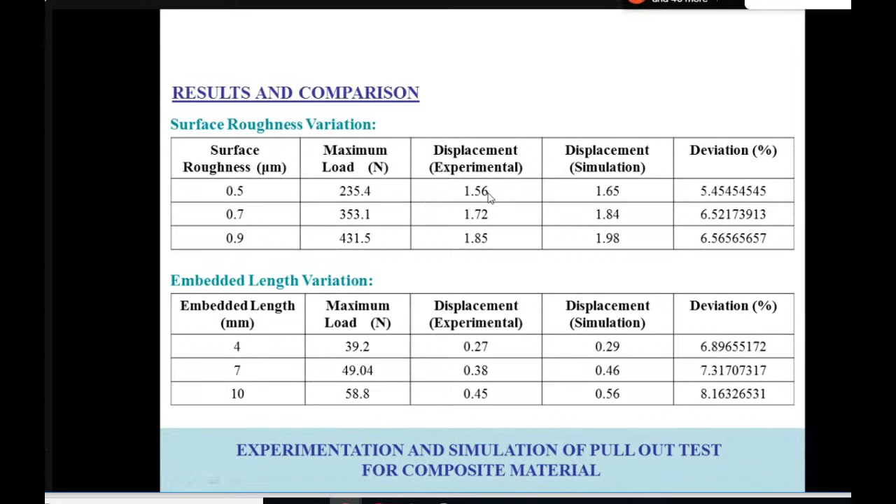So all this result we find in the case of surface roughness is 5 to 6.5, and similarly for embedded length also, when we take the different embedded lengths 4, 7, 10, the deviation is in the range of 7 to 8.16. So this is how you can simulate also by the pull out test for any composite material and any design which you need to take up for designing the composites.

Now I'm coming back to my original slide where I have started with the composite.

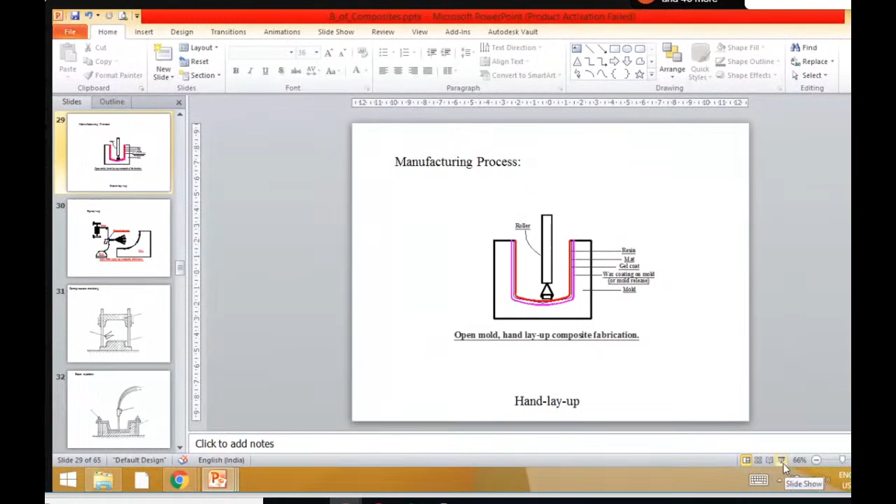It has 3 elements: fiber, matrix, and interface. I talk a lot about interface because it is a very important parameter. Without that, composite does not exist.

Many of you are faculty members or research scholars doing research work. Unless and until you focus on interface, it is very difficult to go for detailed research into composite materials. The manufacturing process is normally applied for developing the composite material specimen.

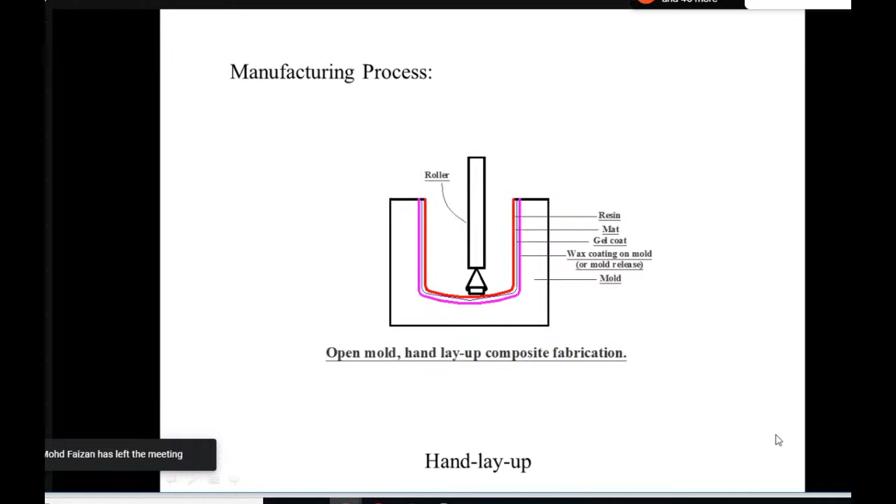If you don't have good facility, you can take a plate, put a plastic material, apply the glass mat, spray the resin, and again put plastic and apply the roller on it, so that you will be able to fabricate the composite material. This is a very preliminary process that people normally use even in day-to-day routine.

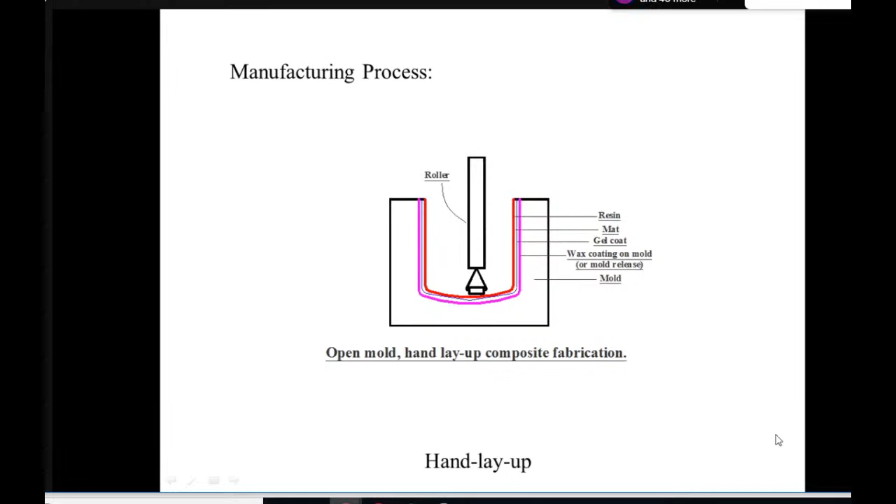Also, when you go to some fabricator, they normally go for hand layup technique only. They use glass mat and spray the resin. After spraying the resin, they apply a roller to remove the void content from the material.

The second one, you can use spray up on the mold. You first put the mold release spray or a plastic film, and then using a gun you spray the chopped fiber with resin mixture, and they get deposited onto that surface. After curing, you can remove it.

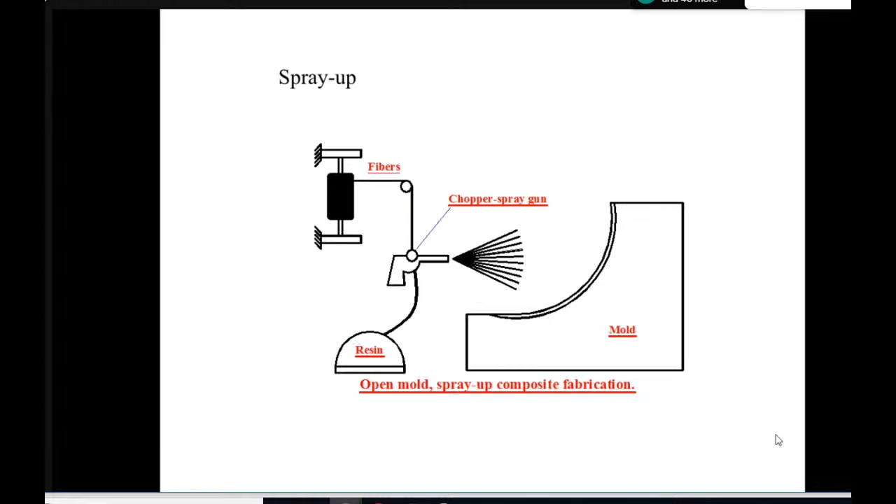Similarly, you can have compression molding. For that you require a match mold. You may have male and female kinds of toolings to give the appropriate shape to your component.

Similarly, you can have resin injection. In the closed mold, you inject the resin, and the process is known as resin injection molding.

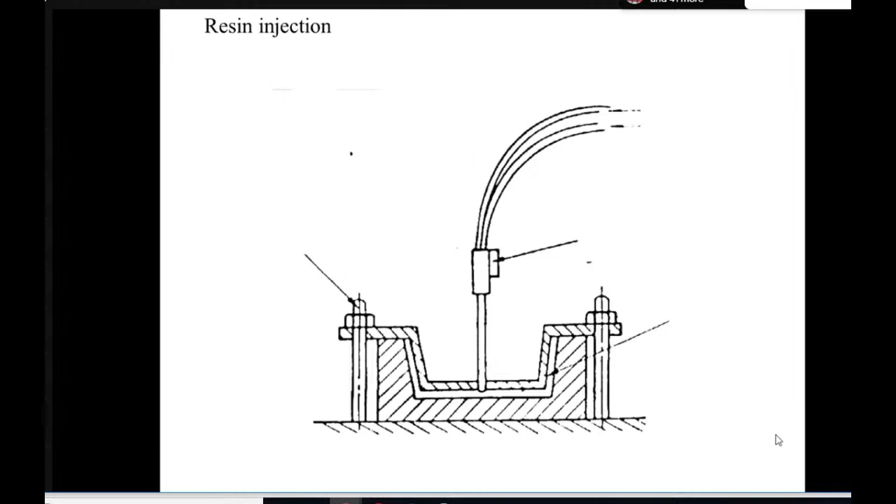Similarly, pultrusion: if you want to create a continuous shape, say a rod, you should have a die with a cross section like a circular one. From one end, you insert the fibers which are already wetted into the resin. Then a puller will pull it, and in the die you apply sufficient temperature by heating, so that the resin gets cured.

Say you are using a polyester resin; elevate the temperature of the die section such that it reaches its kick-off point and gets cured. You try to keep it in the die for a certain period. Post-processing curing is also allowed during the curing process, so that when you remove it, it is perfectly cured.

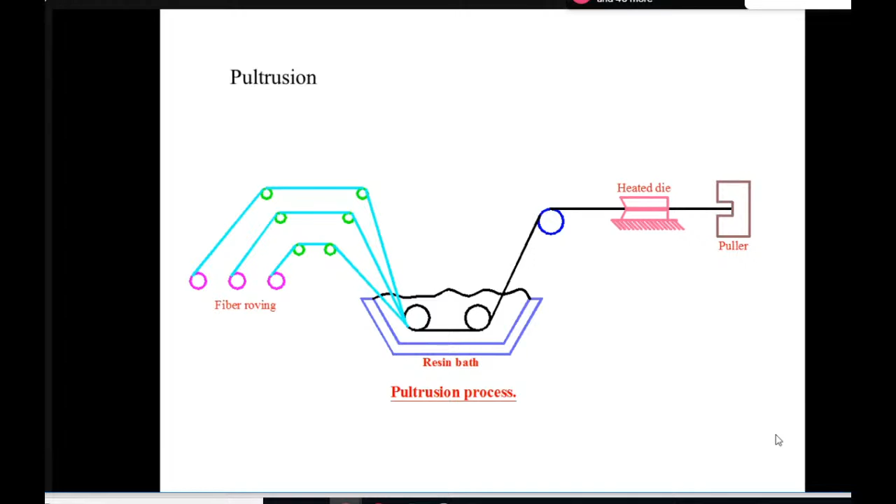No doubt, the curing process is continuous. Even after it is cured and removed from the mold, it may continue curing for a day, days, or weeks. It is a continuous process.

Similarly, you can also have sheet molding compound and bulk molding compound, where you have a charge. Basically you are chopping the fiber into small pieces, mixing it with the resin, and then applying it. Whether you create a sheet between two plastic sheets, or directly apply it onto the mold using a BMC process, it will create a composite material.

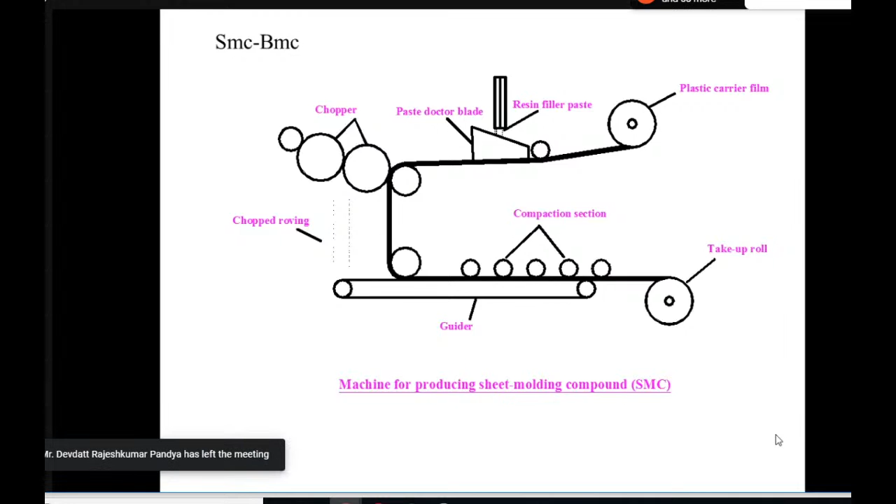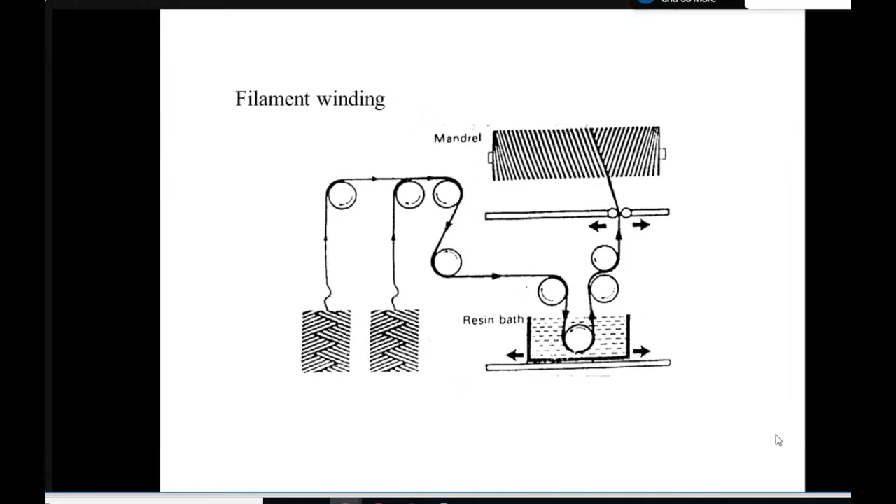Similarly, if you want to create a circular object, you wind it on a mandrel. This process is known as filament winding. The fibers are first taken into a resin bath for wetting, and guides direct them appropriately for winding, maybe plus or minus 45 degrees in both directions, so that uniformity in the material is achieved. Filament winding is a good process for a cylindrical object.

The theoretical aspect we consider in designing is nothing but micromechanics. Micromechanics basically determines what percentage of fiber and what percentage of matrix material you are taking, and what will be its end property. So composite property is the response you are interested in, and for that you must know the constituent property.

Suppose you are taking carbon fiber and bonding them with epoxy; you must know the property of the carbon fiber and the property of the resin, such as epoxy. So the constituent material properties you can have are EF and EM: EF means elastic modulus of fiber, EM is elastic modulus of matrix material.

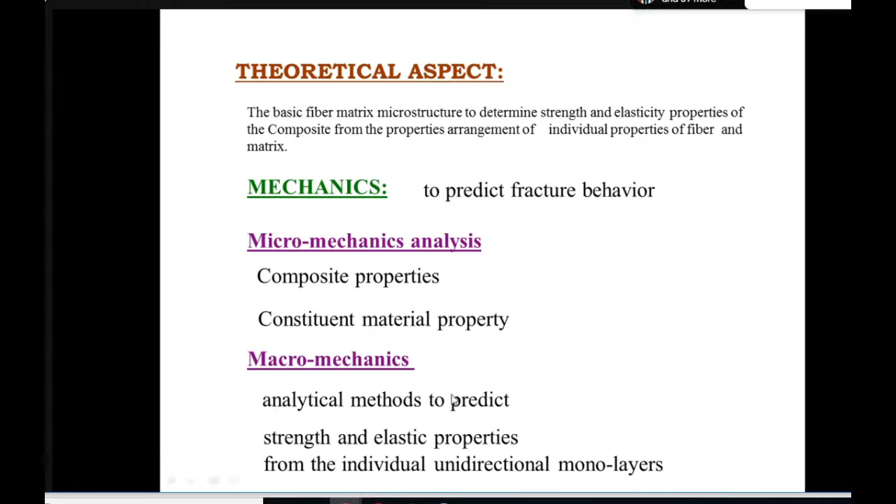Then macromechanics is nothing but an analytical method to predict what will be the composite property, what will be its strength, what will be its elastic modulus.